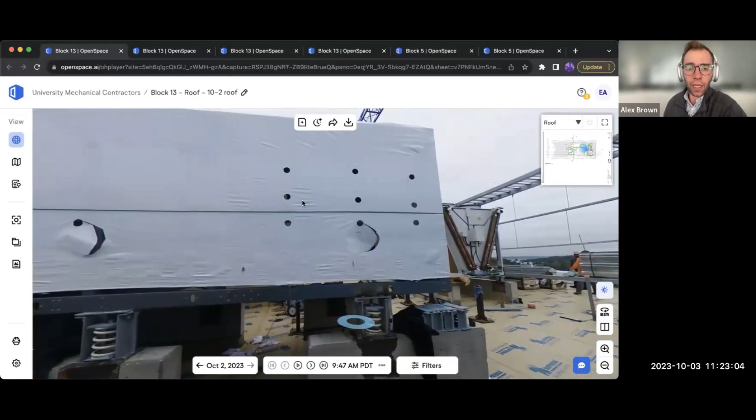Yeah, no, that's incredible stuff. So tell us a little bit about your journey with OpenSpace. You guys have been using us on a couple projects so far. So tell everyone a little bit about what your process was before you started using OpenSpace, and how this tool has been able to help you out.

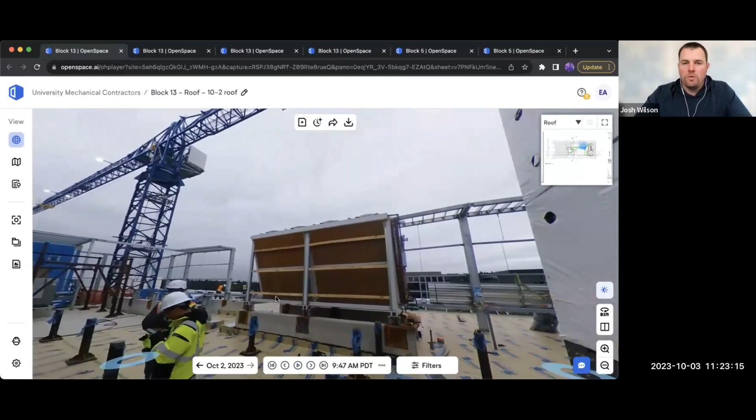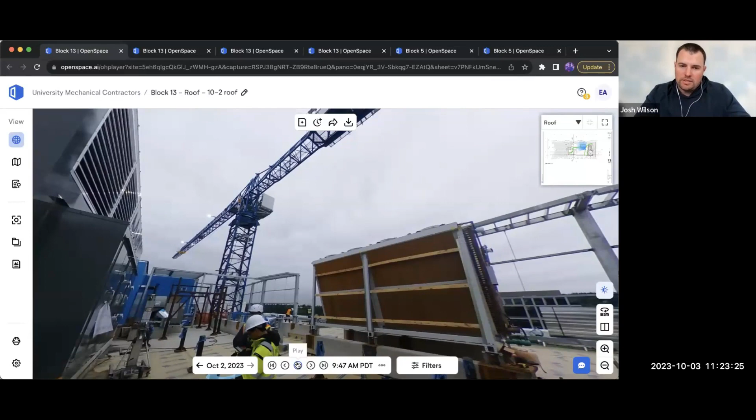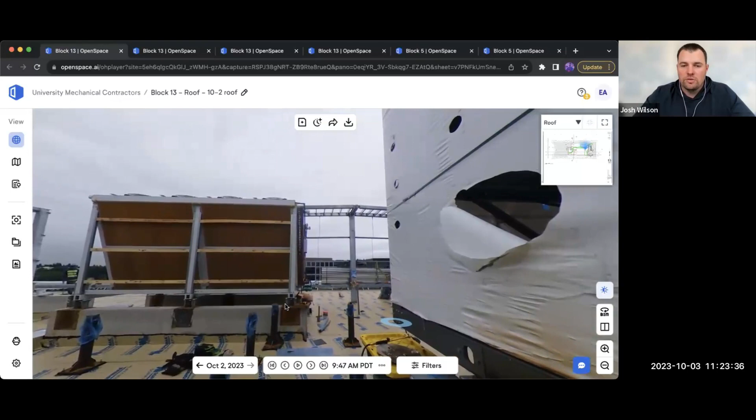Yeah, so we're using OpenSpace actively on two projects. Both are shell and core office buildings of similar nature. What we're using OpenSpace for is primarily reality capture and just 3D documentation of site conditions or site progress on a biweekly basis or twice a week.

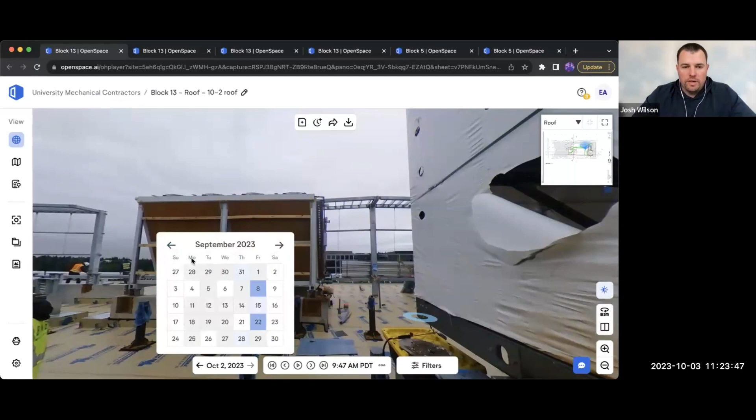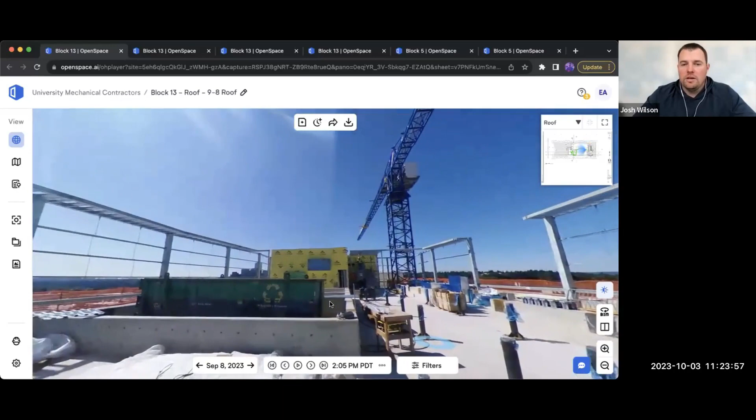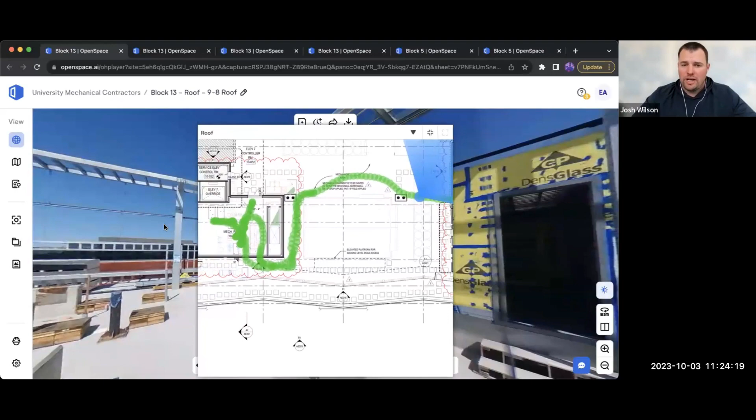Before OpenSpace, in order to collect that same information, it involved a field walk and a camera, and taking a whole host of photos of things that you think may be important later on down the road, and then cataloging those photos in a folder somewhere for later reference, whether that's photographing content in a wall before it gets covered up, in a shaft, or site conditions on a given day, et cetera.

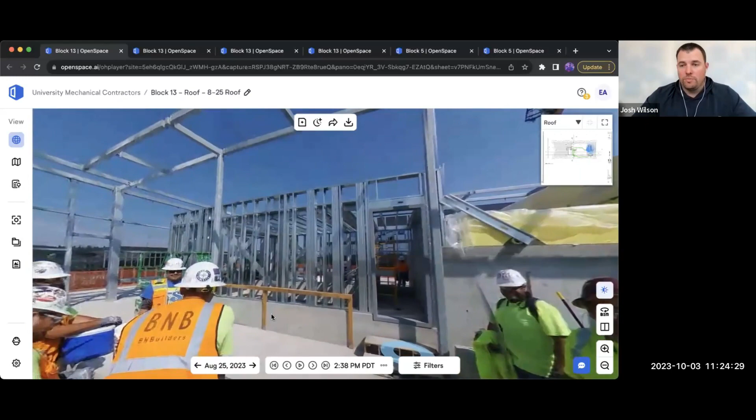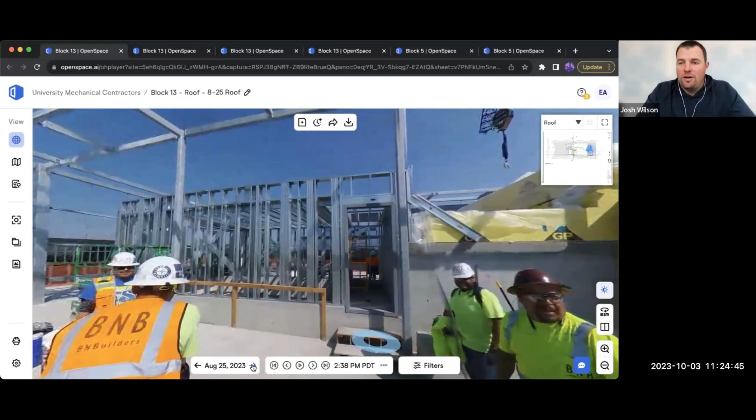What we are using OpenSpace for is essentially replacing all of that. So an individual will be walking the site using the 3D camera strapped to their hard hat, and produces a similar image like we're looking at here. And then that image is basically automatically cataloged in the OpenSpace software, which automates the data collection process.

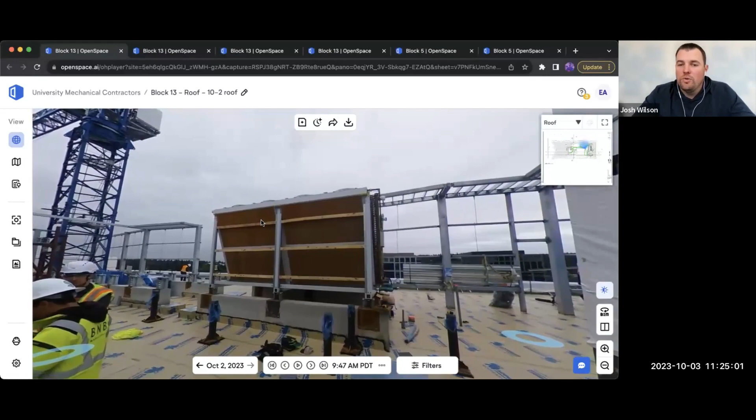But the beauty of OpenSpace, from what we've seen thus far, is you don't necessarily know which piece of information, which pixel in that image, is going to be important later on. OpenSpace captures all of it. And if there's any one thing that's important that you need to go back and look at, you have it because you have a 3D roadmap of the entire project.

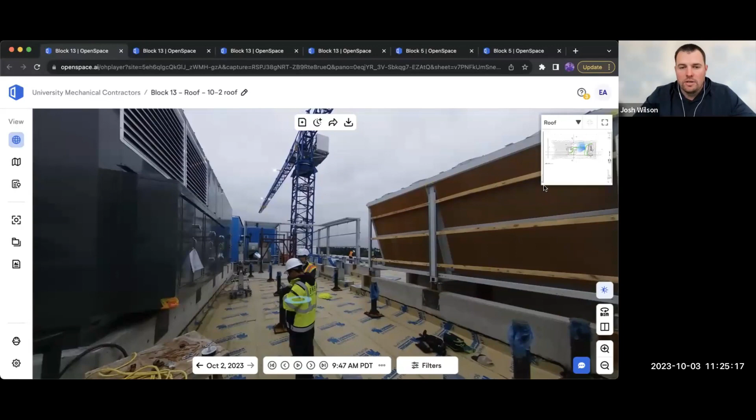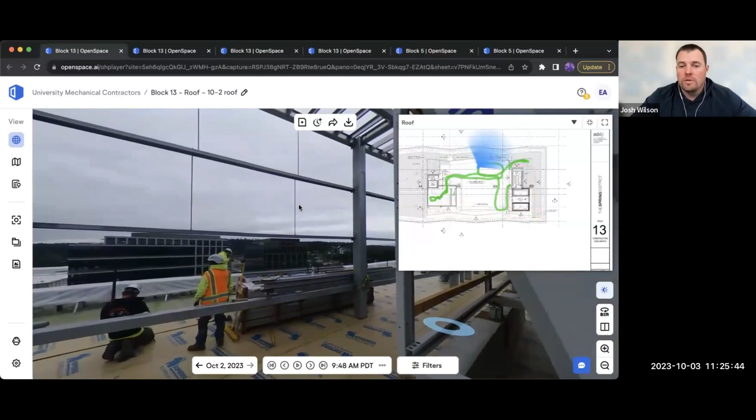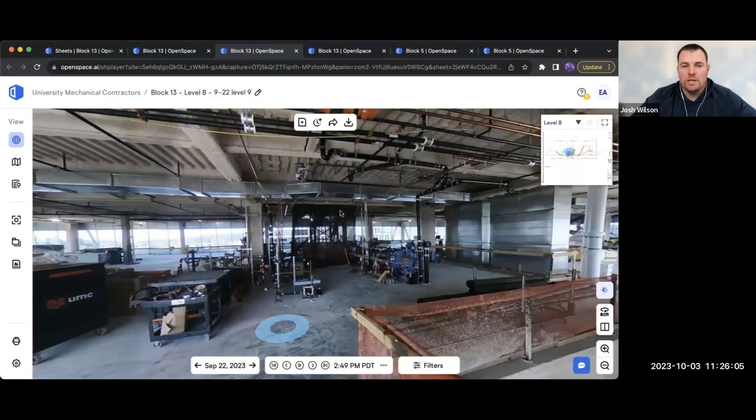So it's really just collecting a mass amount of data and then making that data available to the entire project team. We make this data available to our subcontractors and our entire project team. So if people have a question, like what is the current condition of the site, or when did this particular item get installed, you can look back in time or look at the latest information, and see exactly what's going on at the site without having to drive to the site and take that walk. It's visible to everybody who has access to the platform, which has been incredibly beneficial, saving a lot of time and travel.

Yeah, it's been a great addition.

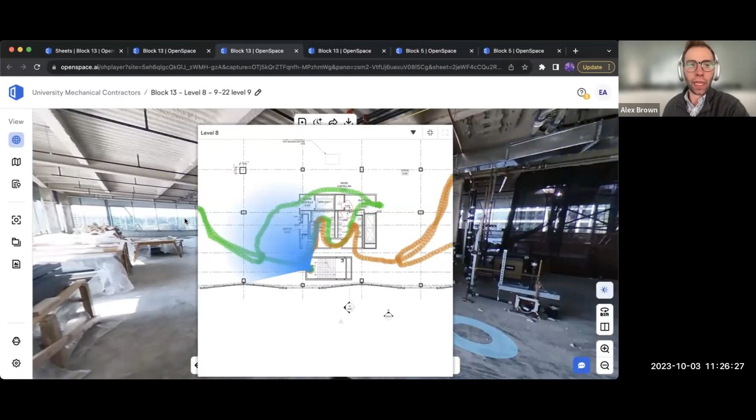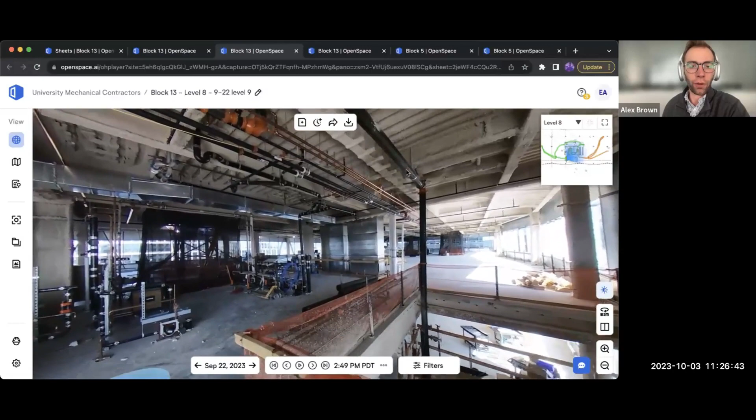I'm curious, for any folks watching who may not have a background or experience in construction, why documentation is important. I'm curious if there are any stories in your career where a photo like this would have been helpful, or if you can explain why it's important as a contractor to have this historical record of the site at hand.

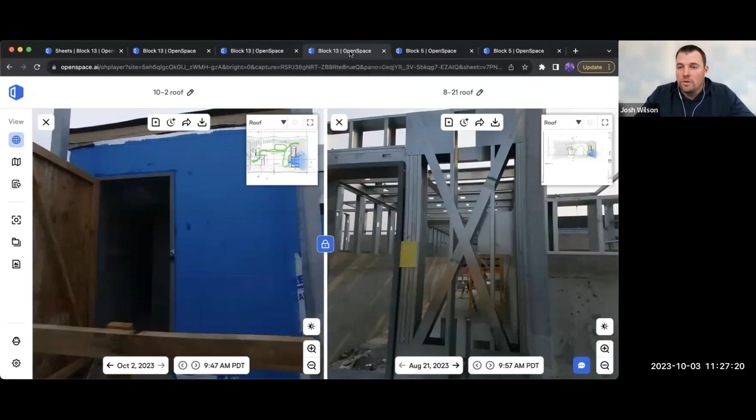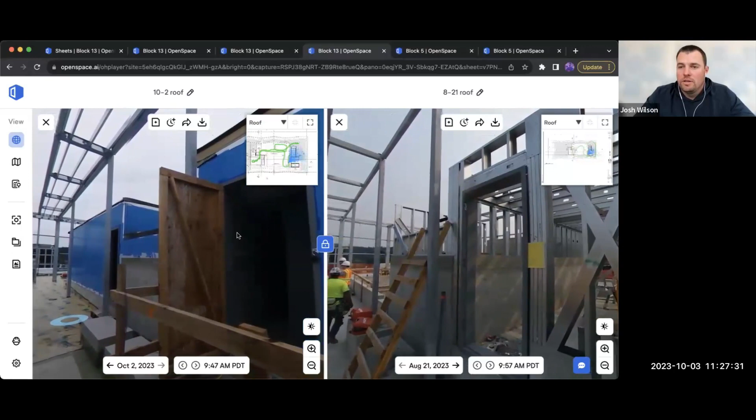Absolutely. So it all comes down to, like everything does, dollars. If you can document conditions and build a case in the event of any disagreement, or potential for cost reimbursement or back charge, whoever has the most documentation and the best story usually wins. Having the 3D documentation time-stamped, it's not something that can be argued. It's pretty good documentation.

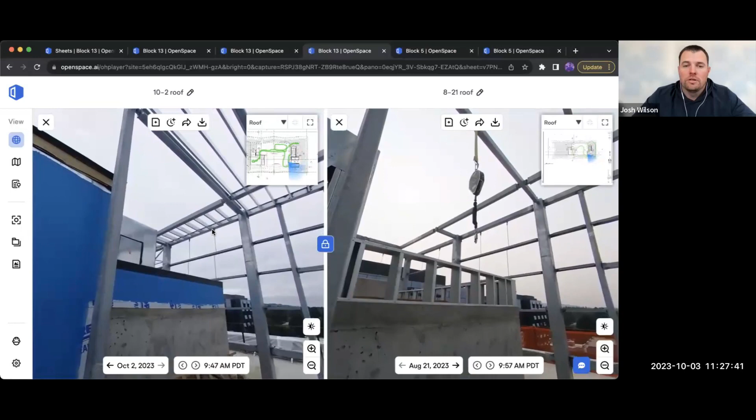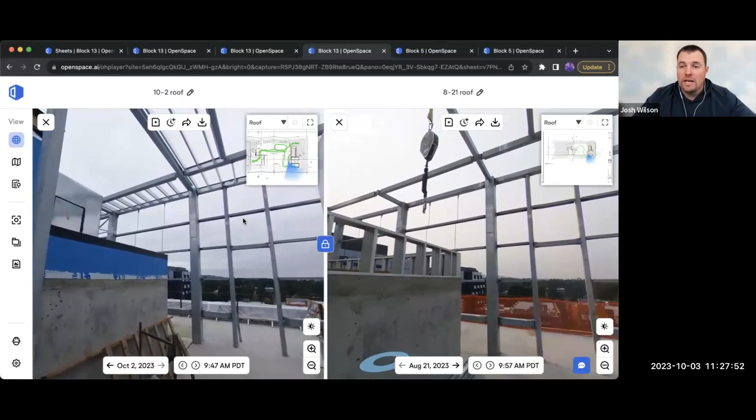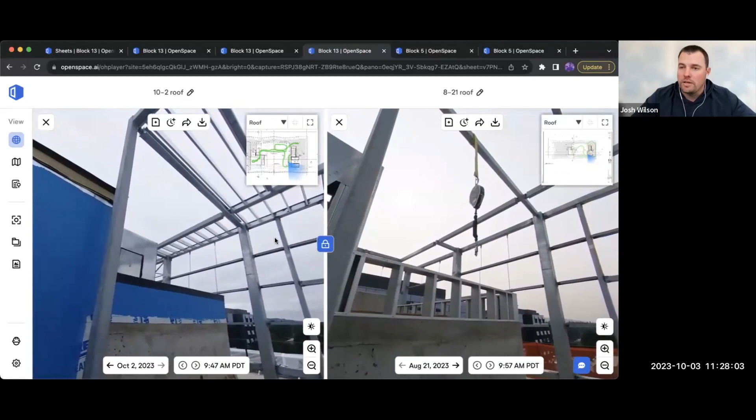And it does lend itself towards change order negotiation, any potential impacts due to sequencing or scheduling—makes it very easy to state your case. If you know there is an issue in the field and you need that documented, just go walk the job site, and OpenSpace captures all of that and provides you with all the backup and information needed to support your case.

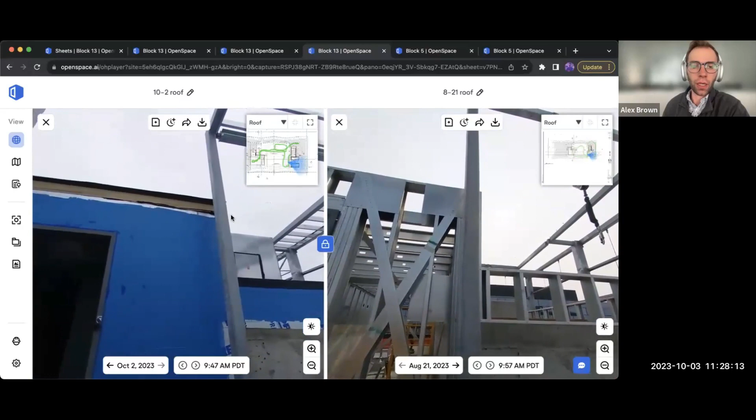Yeah, I think on top of just having the photos, y'all have been able to try out some of our more advanced features as well, like the 3D model comparison. Tell us a little bit about how UMC has been using this BIM comparison tool, or any vision around how you're hoping to use it in the future.

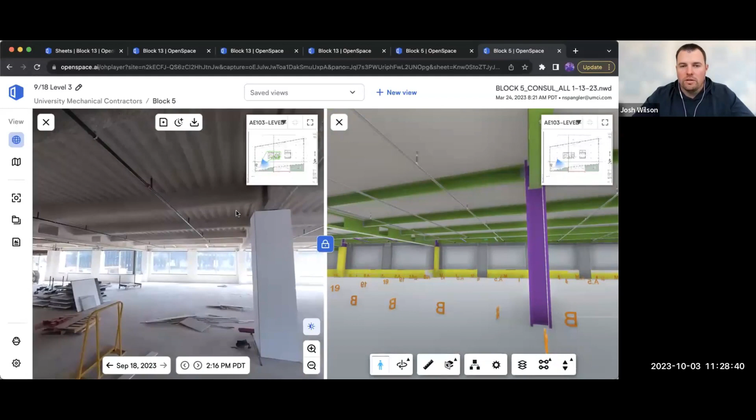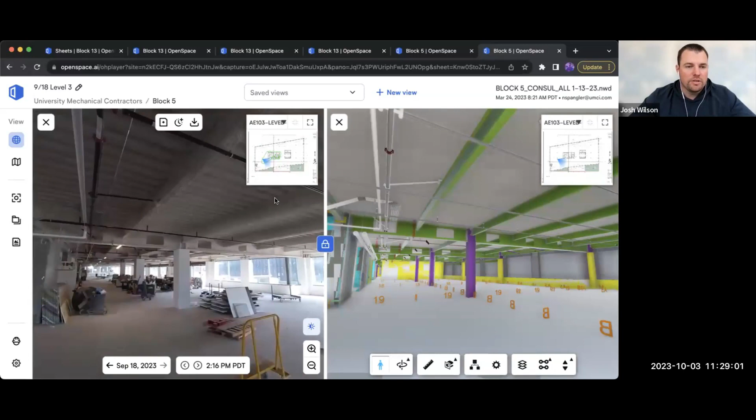Yeah, so like we're seeing on the screen here, you get a side-by-side view of the current condition of the job site and effectively what the complete install will look like via the model on the right. To date, we've been using this as on-site clash detection or post-coordination activities. In this example, we can see there's a sprinkler pipe and a domestic water line sharing a beam penetration, but the conduit rack that shares that beam penetration is not yet installed.

We run into a number of scenarios where the field routing doesn't necessarily match the coordinated model, and it makes for an easy conversation in the field. Things can get a little bit contentious when you say you're in my spot, you need to move, and that conversation usually takes several days to run to ground, because you have to involve the BIM department, you have to involve the project manager—everyone just kind of, it takes a long time to have that conversation and determine who's in the correct location and if a move needs to take place.

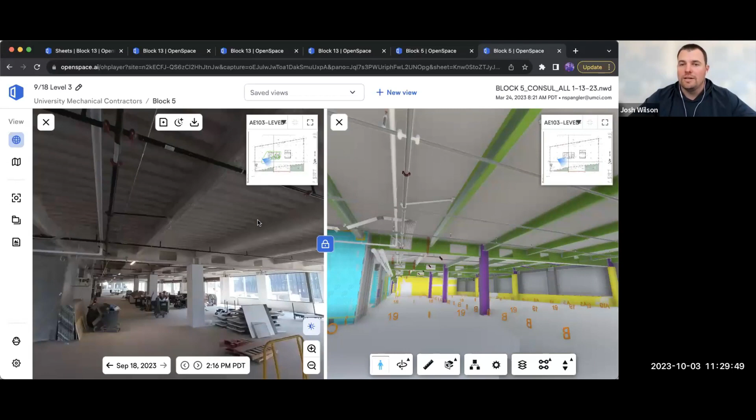This visual representation here gives you that information right away, and you can have those conversations without ever having to leave the field, and things are much easier to coordinate when you can see everything at your fingertips.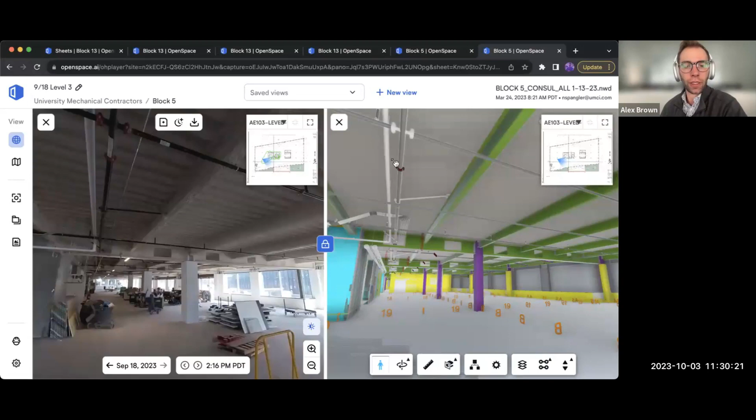Yeah, tell us a little bit about how you are sharing this information as well with your other trade partners and your generals. I know your team's been using field notes, for example, to create PDF reports. Tell us a little bit about that process and how that conversation goes with your clients.

Sorry, I lost a little bit of connection. Yeah, can you repeat the question?

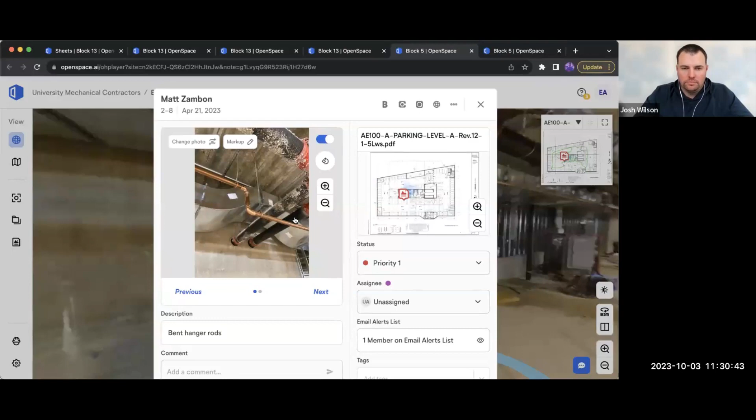Yeah, no worries. We were talking a little bit about the reporting side of this as well—outside of just having access to the record of the data, how you're using this in conversations either internally or with any trade partners or clients. Yeah, so the field notes are great for specific questions that aren't necessarily answered by just the 3D image capture.

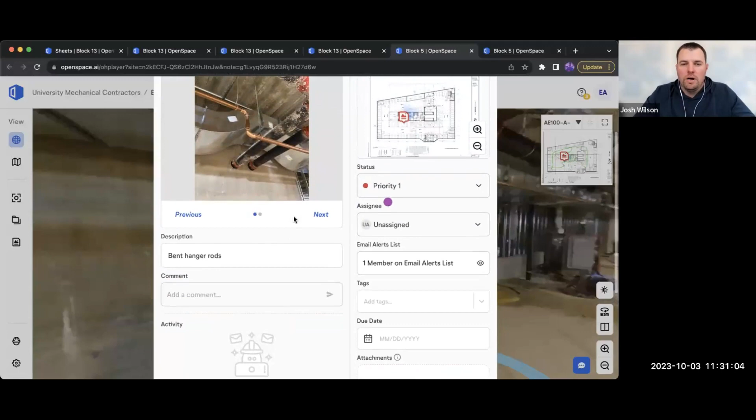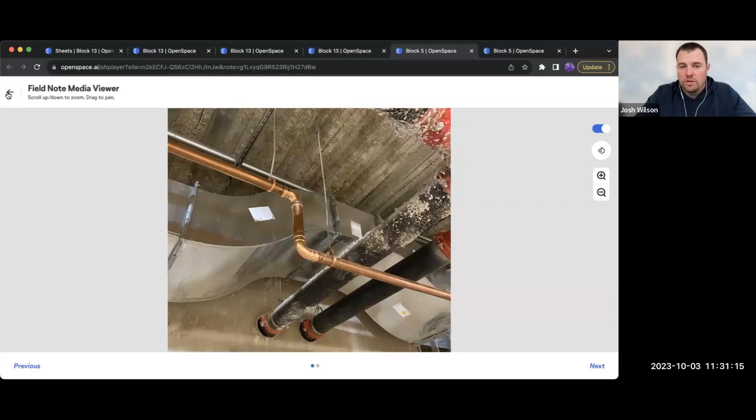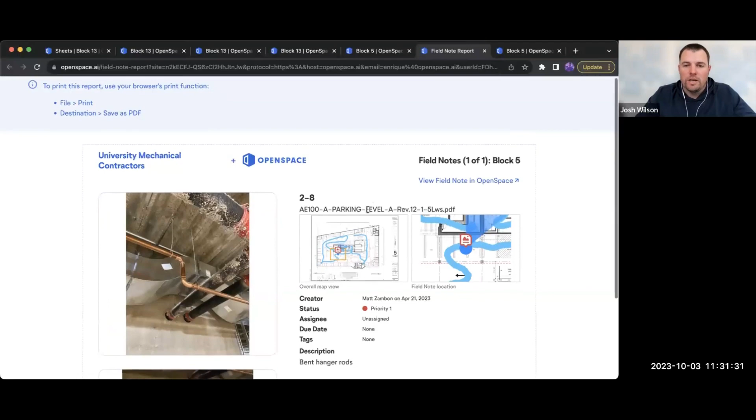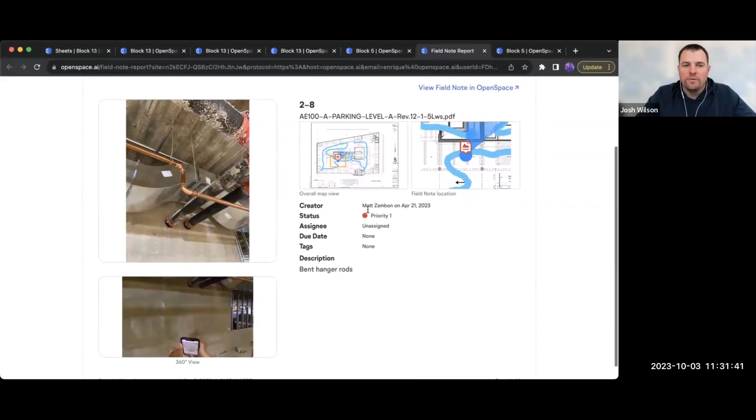So we have been using these snapshots to add to the drawing and then follow it up with a question. We typically use them for information gathering, whether that be an RFI that needs to be generated from this software and sent off to the design team or architect for confirmation or clarification, or whether it be an internal question or communication. It's an easy way to extract information from the field and document it all in a clean format with the OpenSpace platform.

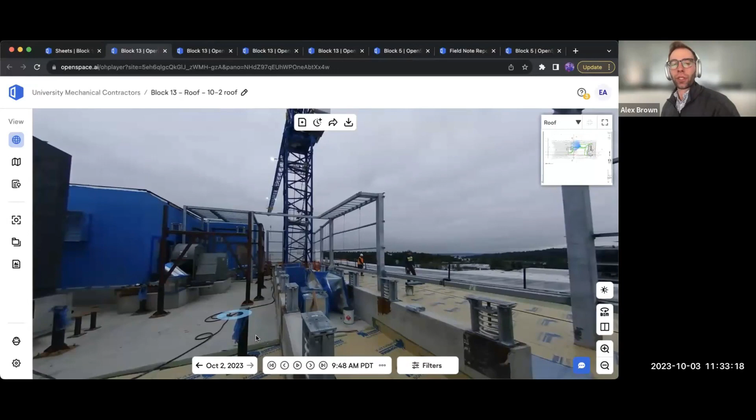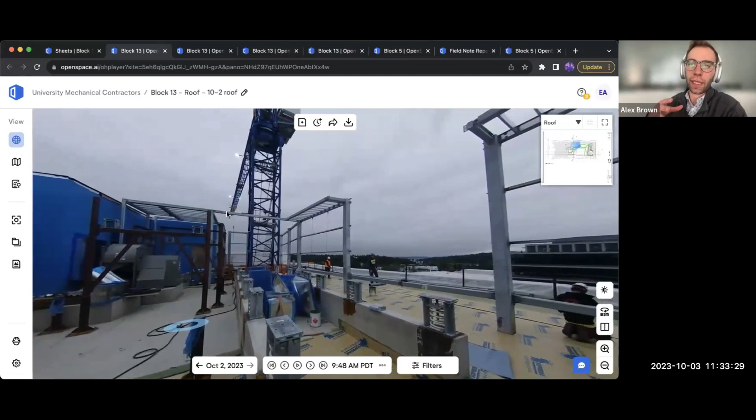So for another contractor who's potentially watching this right now, who may be in a pretty similar role to you at another company, who may like what they see but need some help understanding the process of how you got this tool adopted in-house, what sort of advice would you give them on how to get started?

Sure. So first of all, it's very easy to implement. It's not a heavy lift. So if the concern is that there's a lot of setup and processing required to make this work, there's virtually no setup or processing required—all of that is done on the OpenSpace side. You give them a set of drawings, you give them a copy of your model, and everything is set up on the back end behind the scenes. Within a couple of days, you get access to this complete platform for your project, ready to go.

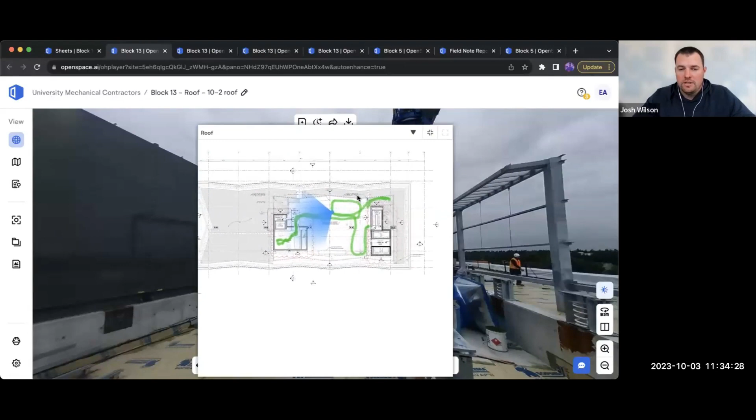In terms of benefits, the more data you have, the more you can do with that data. If you are missing data, you are missing out on some potential, and it's impossible to know what that is until after the fact. So hindsight is 20/20, but the big questions really are: how difficult is it to set up? How much time is it going to take for us to implement? And what are the benefits?

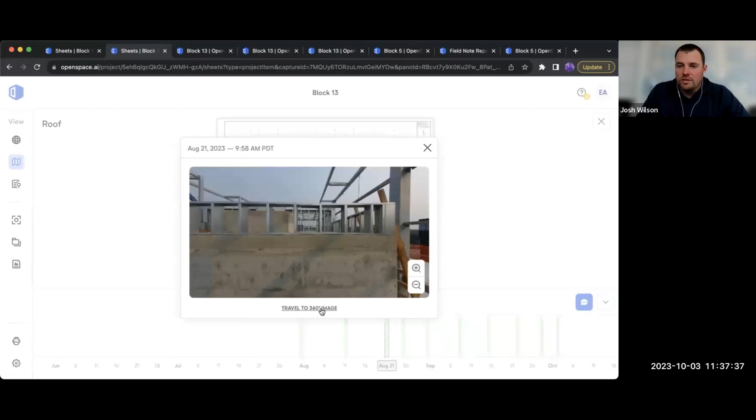So the implementation is incredibly easy. You can collect as much data as you want simply by walking the project as much as you want. The more you walk, the more data you collect, and the more action you can take with that data. And the main benefit is that data, right?

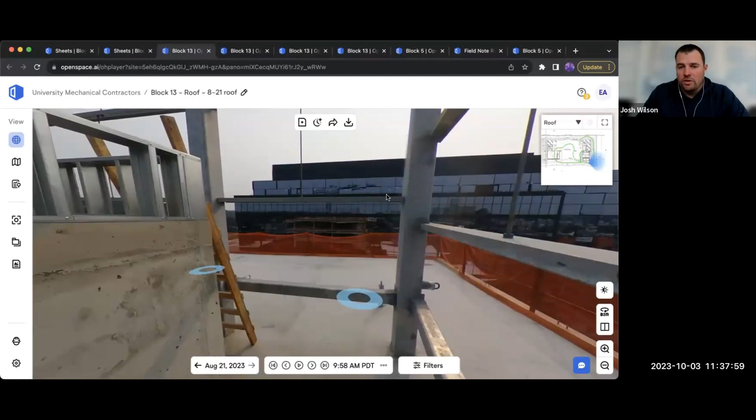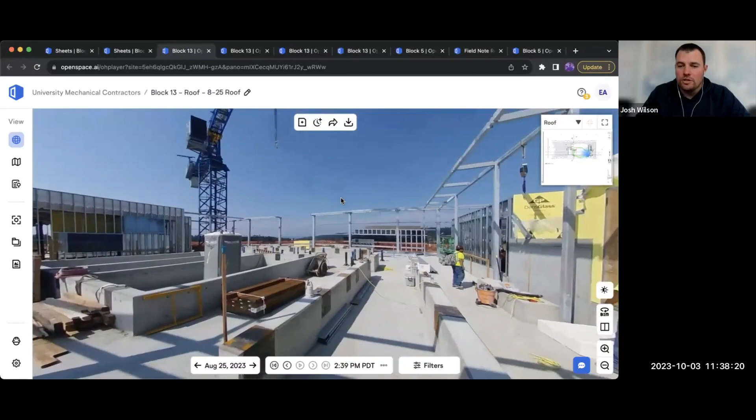You can't go back in time and try to collect data from the past. You can try to mine through emails and pictures you might have taken, data you might have collected, but it's very difficult to do retroactively. So collecting all that data proactively just grants you that opportunity. Should the need arise, you can go back and reference that data and catalog everything, and just have that on hand.

There are some other benefits that we're kind of getting into here shortly with the AI, and some other things that the AI is doing with the imagery, that are pretty exciting. But those are kind of upcoming benefits.

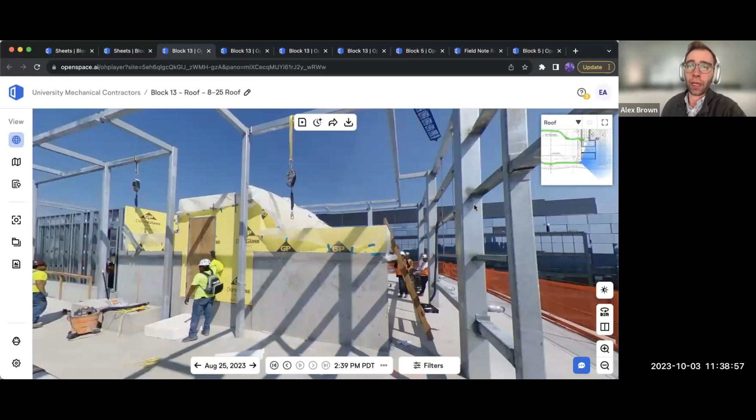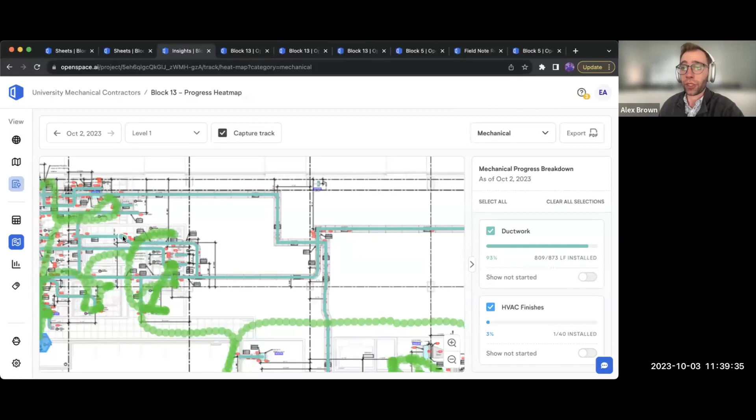So in this case, we have the mechanical ductwork tracker set up on this project. And Josh, if you could talk a little bit about how UMC's current production tracking process works, and how data like this can potentially tie into that process. Sure, so this is kind of the holy grail.

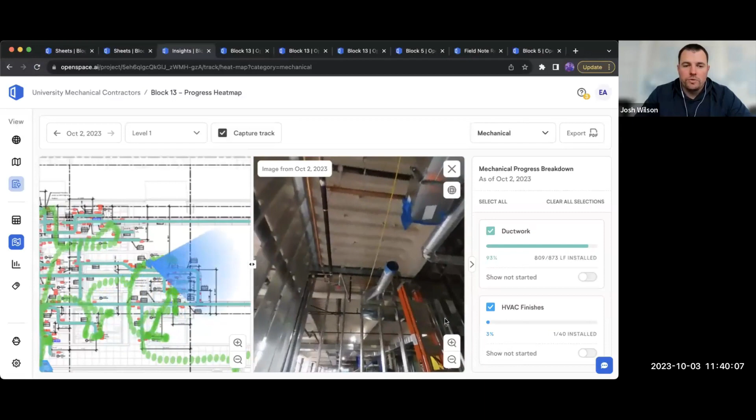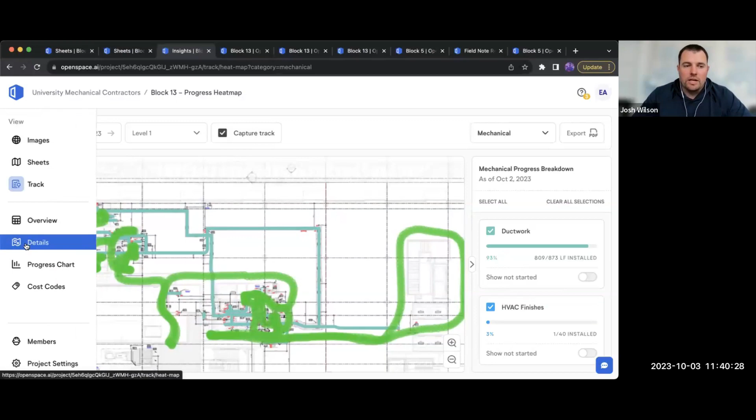Trying to accurately calculate and then project progress and what the effort is to complete an install is going to be - that's kind of the holy grail. Our process to date has been walking the project with a set of drawings or a tablet with drawings open, highlighting installed progress to date, and then taking that information back to the job site office and analyzing that data, whether that be doing a takeoff of components installed or counting pounds of sheet metal, and then collecting and calculating our current progress on the project, and in turn productivity using that data. It's a fairly manual process, and it does take some time.

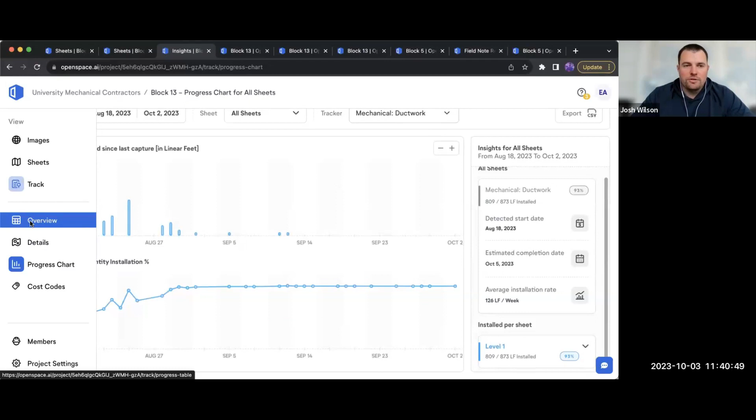What is very exciting about OpenSpace is, like Alex said, they're training the AI to do all that for you. So if you go back to that track sheet, that thick green line is the walk path of our personnel that walked the space. And this is overlaid over an install drawing. And then you can see where it's highlighted the installed ductwork. So the AI has recognized that ductwork lines up with the correct ductwork on the drawing, and it's highlighted the drawing automatically based on what it's seeing out in the field.

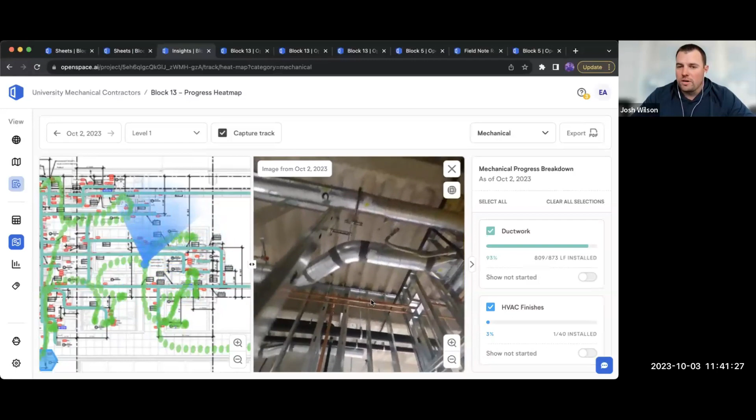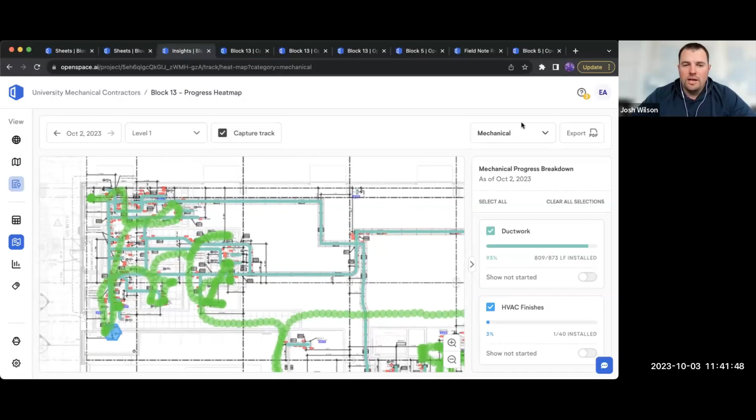So this means no more manual markups of drawings, no more errors and misidentifications, anything of that nature. It's all done via the AI, and it is a massive time saver. And then you can process that information much quicker and get real-time updates on field progress.

Yeah, that's amazing that you guys have been able to test this out so far and verified the accuracy of it. How does this tie all into your billing process, financial forecasting, being able to understand what's been installed week over week?

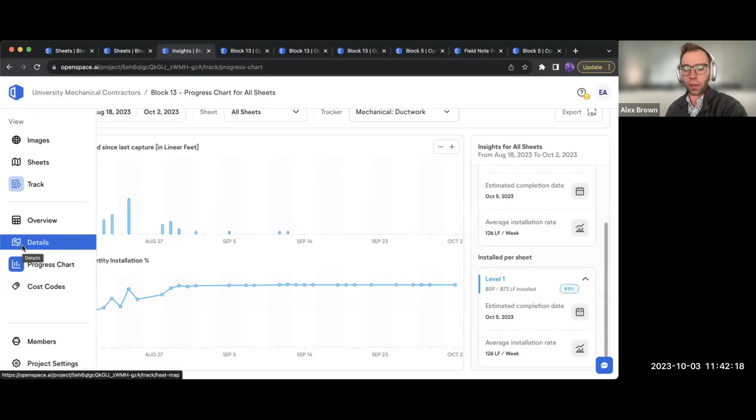So yeah, every month when you invoice the client, typically they come back and ask you to explain why you're invoicing for X dollar value this month. And so you always need to be able to explain what it is you're invoicing for, and prove that it is valid, right?

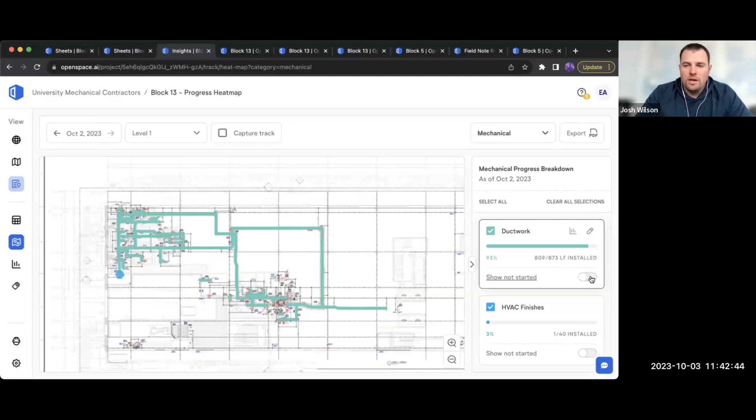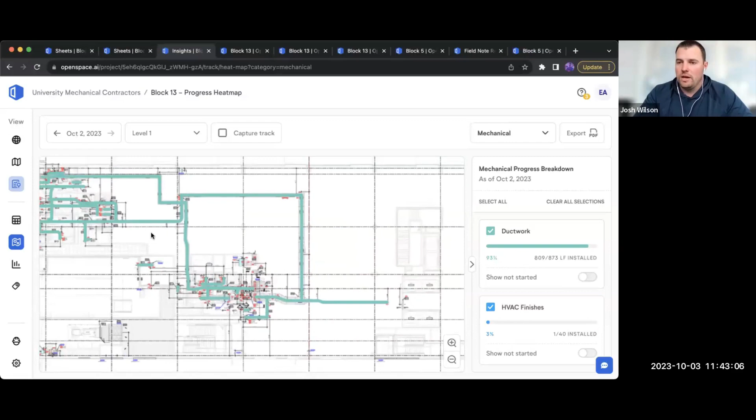So this AI capture is a very easy way to do that, to show - I can walk you through the space in person, or we can virtually walk through the space, and we can show you exactly how much progress we have been making over the past weeks or in whatever billing period, and how much progress we are projected to make based on data collected to date. And it's very easy to justify invoices to the client using that data and showing that you have the data and you are paying attention to it and tracking it.

Goes a long way to telling that story. And then it also helps the client feel more connected to the project. They know where you're at. They can see the data, and everything's there on display.